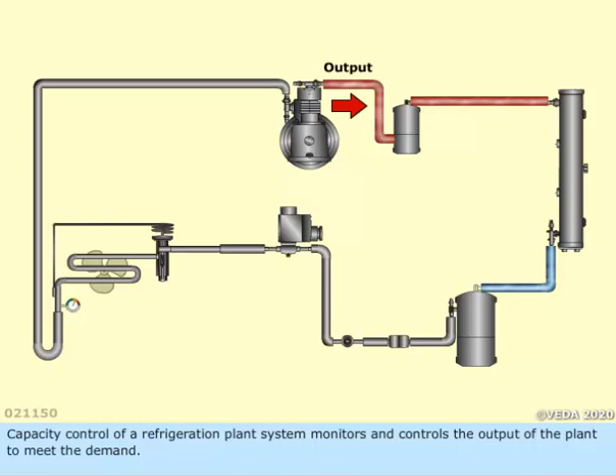Capacity control of a refrigeration plant system monitors and controls the output of the plant to meet the demand. As the temperature of a room reaches its required level, there will be no more need of the refrigerant flow for cooling that room.

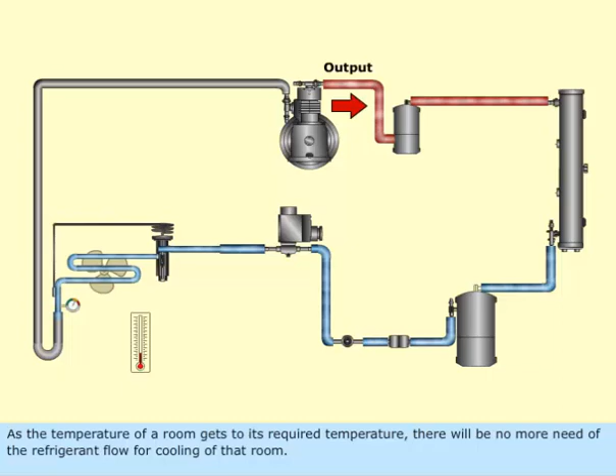The solenoid valve supplying the controlled quantity of refrigerant to that particular room will close. As the solenoid valve closes, we may need to unload a unit in the compressor.

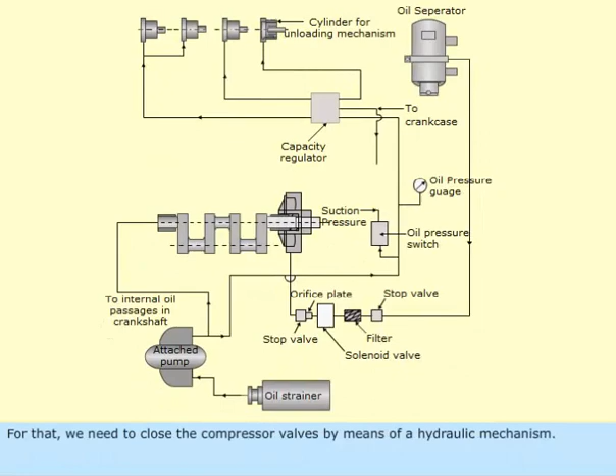For that, we need to close the compressor valves by means of a hydraulic mechanism. In this system, the suction pressure is used as the pilot to operate the capacity regulator for unloading operation.

The solenoid valve fitted in the oil return line is interlocked with the compressor motor starter. This interlock ensures that the solenoid valve will be energized open only when the compressor is operating.

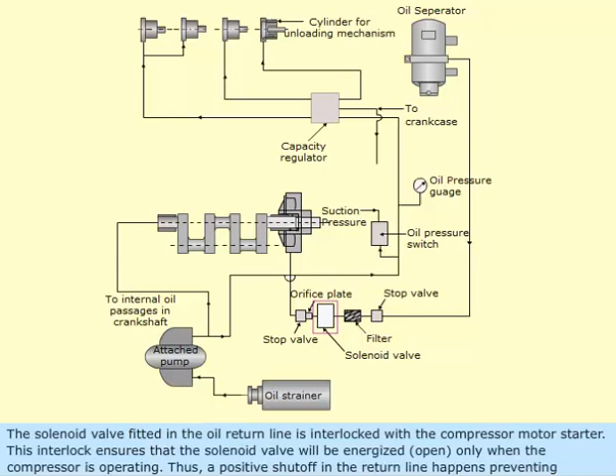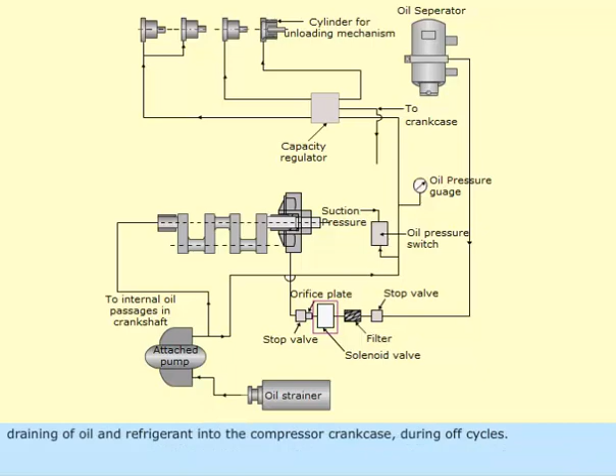Thus, a positive shutoff in the return line happens, preventing draining of oil and refrigerant into the compressor crankcase during off cycles. The orifice plate controls the flow back of oil to a minimum to avoid oil slugging into the crankcase.

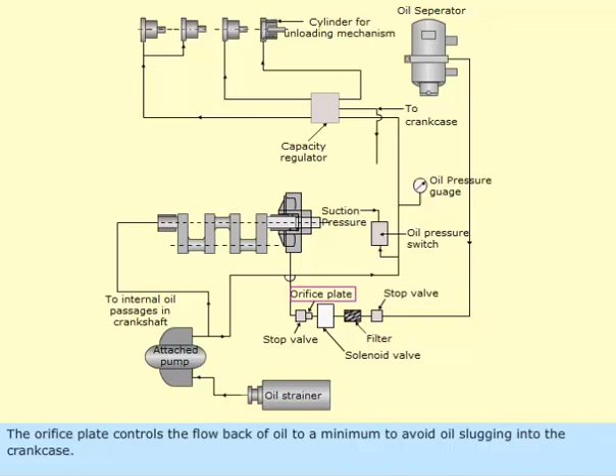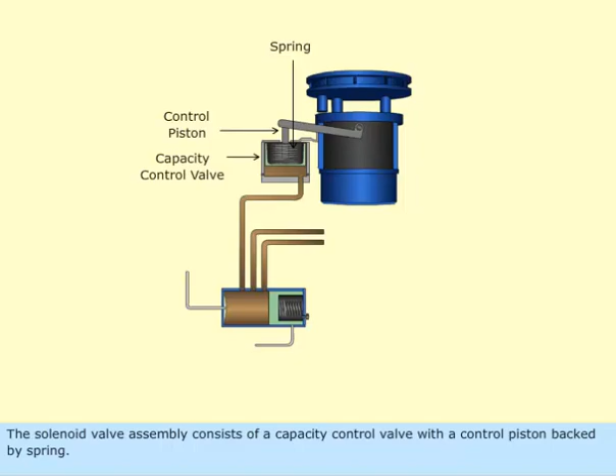The solenoid valve assembly consists of a capacity control valve with a control piston backed by a spring. The capacity control valve will be in the unloaded position when energized, and in the loaded position when de-energized.

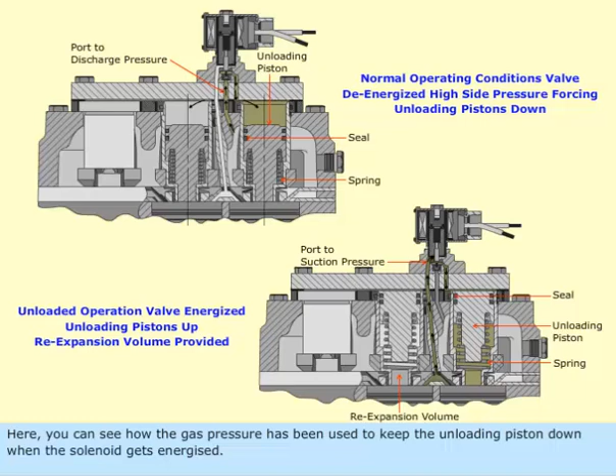Here you can see how the gas pressure has been used to keep the unloading piston down when the solenoid gets energized. The oil supply pressure in the capacity control valve is regulated by the capacity regulation valve.

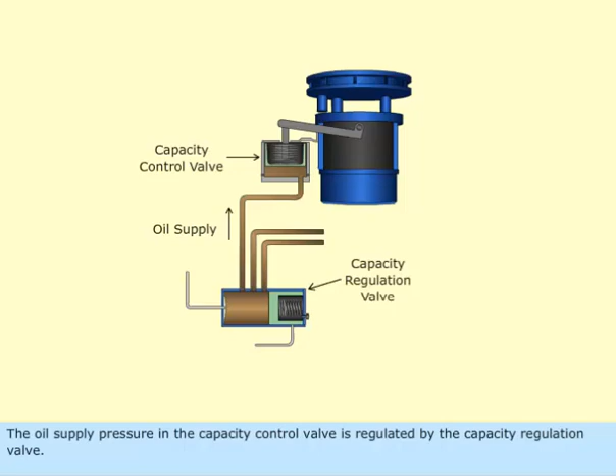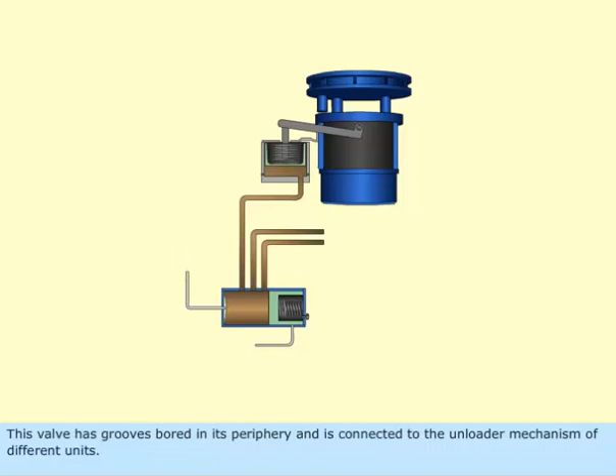One branch of the capacity regulation valve is supplied with oil from the supply pump of the compressor at constant pressure. This valve has grooves bored in its periphery and is connected to the unloader mechanism of different units.

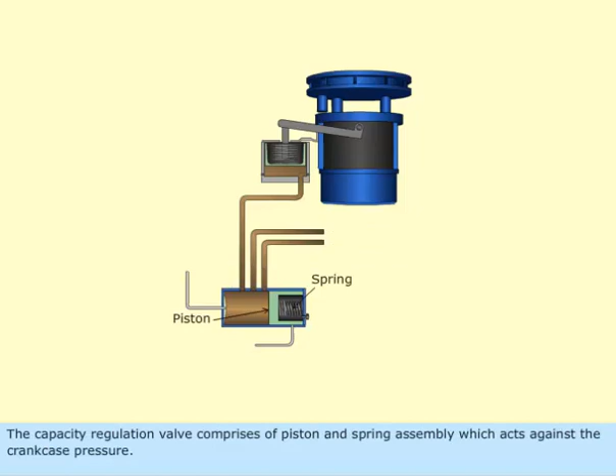The capacity regulation valve comprises a piston and spring assembly which acts against the crankcase pressure. Different units of the refrigeration compressor work in parallel to manage the load.

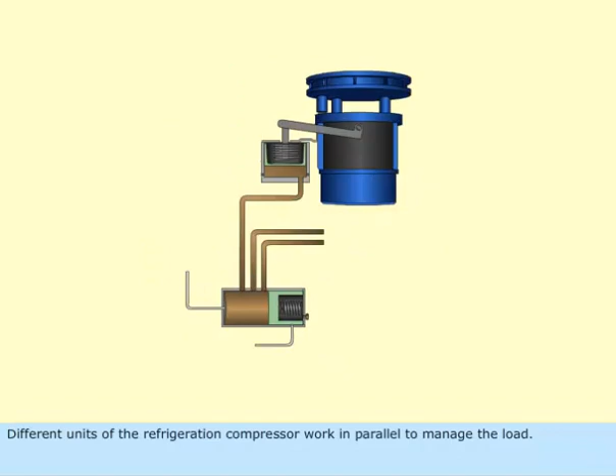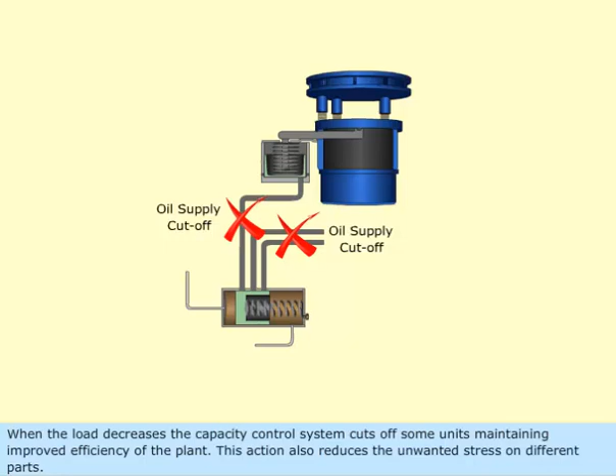When the load decreases, the capacity control system cuts off some units, maintaining improved efficiency of the plant. This action also reduces unwanted stress on different parts. By default, the unloader assembly keeps the suction valve in the open position.

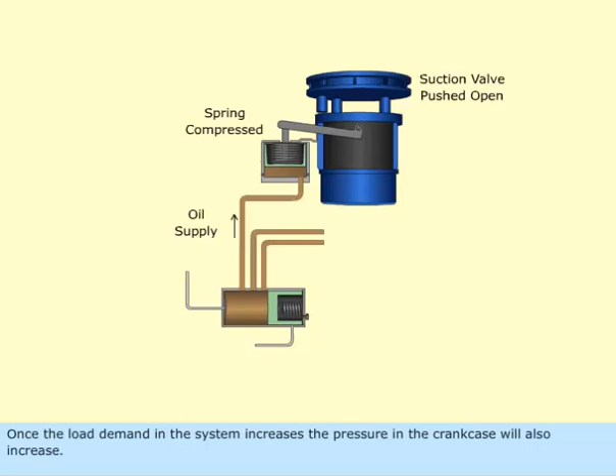Once the load demand in the system increases, the pressure in the crankcase will also increase. This will press the piston of the capacity regulation valve, cutting off oil supply and blocking the oil supply to the unloaded unit.

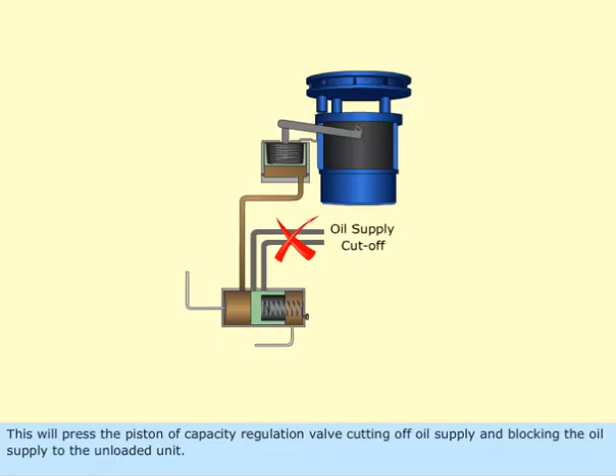That will close the suction valve and that particular compressor unit will come into action.

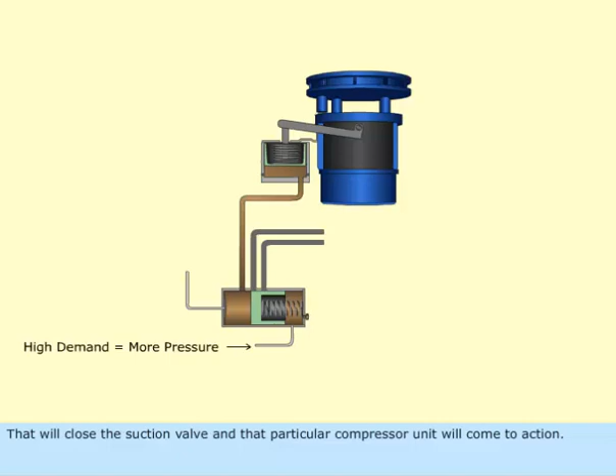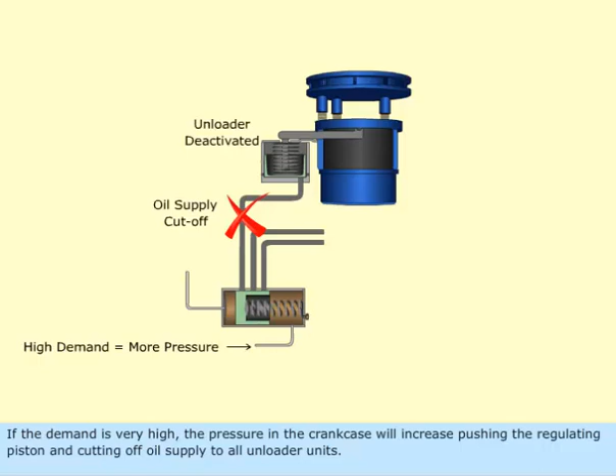If the demand is very high, the pressure in the crankcase will increase, pushing the regulating piston and cutting off oil supply to all unloader units. This will bring all the units into operation to cater to the higher load demand.